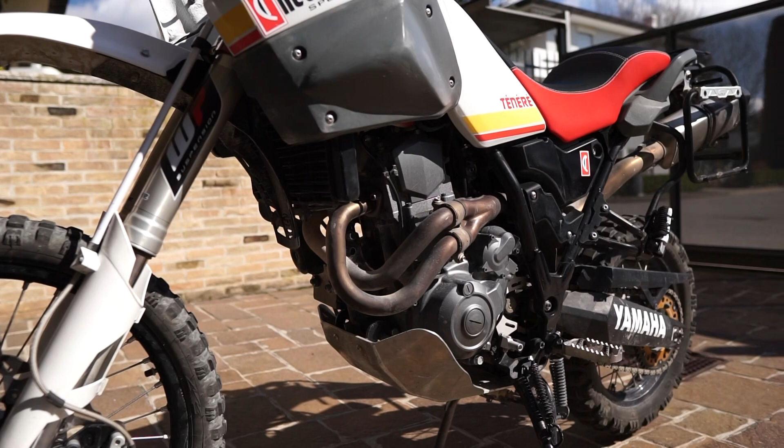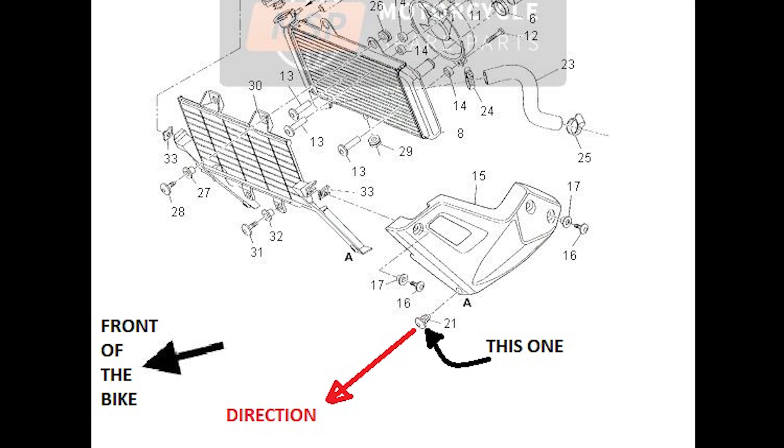We will start with the easy side of the bike, the exhaust side. The first thing to do is to remove the plastic clip in the bottom front of the side plastic panel. Just push a little bit the center of the clip with a screwdriver or any other tool that can fit, and then push it out from the holes in the plastic of the radiator guard and the side plastic panel, in a direction that goes from the engine to the front wheel.

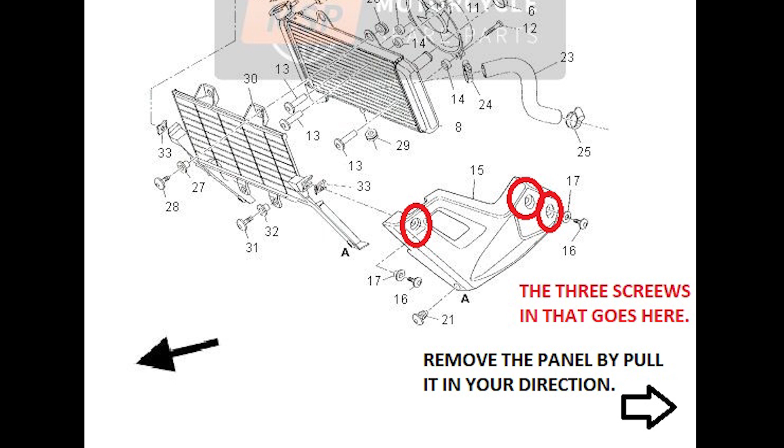Now remove the 3 screws that hold the plastic side panel in position, and then remove the side plastic panel from the bike. No fear, you will not damage anything.

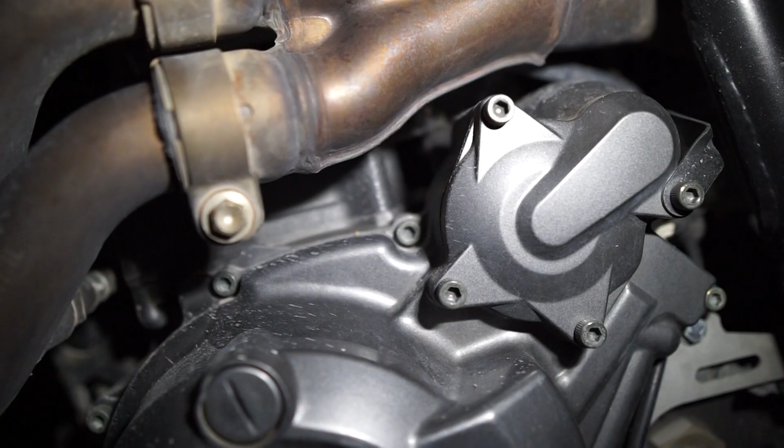At this point there is a steel heat shield attached to the bike only with 2 screws of the engine. Remove those 2 screws that I'm indicating to you to remove the shield. Put the screw back on, and with this side we are done.

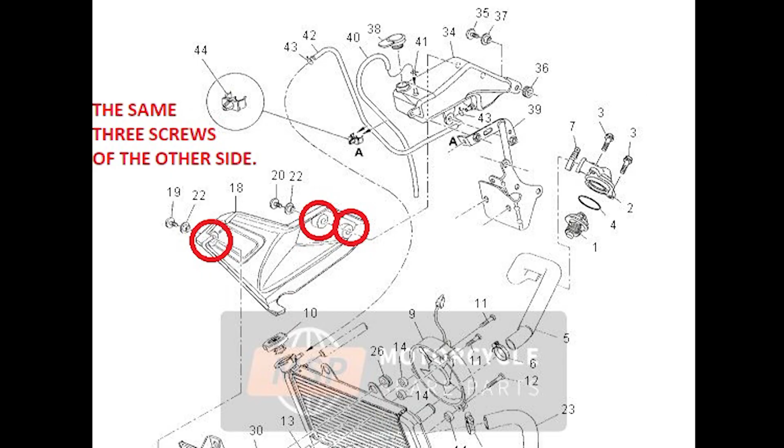Now let's jump into the part that all of us were waiting for, the side of the cooling tank. As for the other side, remove the plastic clip in the bottom front of the side plastic panel as explained before. Then remove the 3 screws that hold the plastic panel in position. As for the other side, you can see that the panel comes off easily.

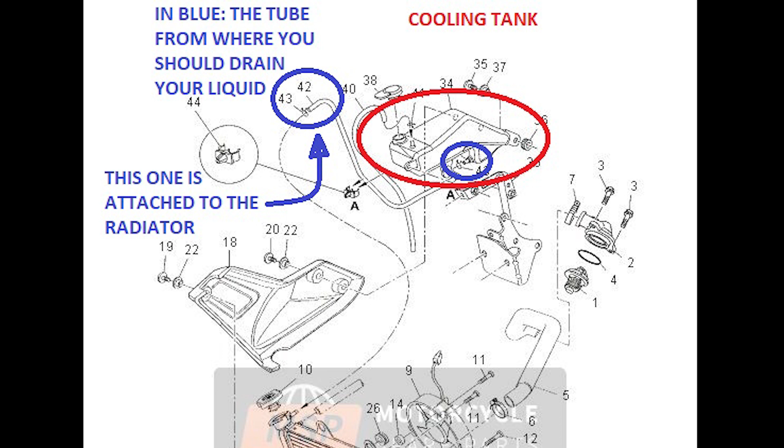Now drain all the liquid out from the cooling tank, then remove the bottom front tube that connects the tank to the radiator cap zone. Now unscrew the 2 screws that hold the tank in position and then remove the tank.

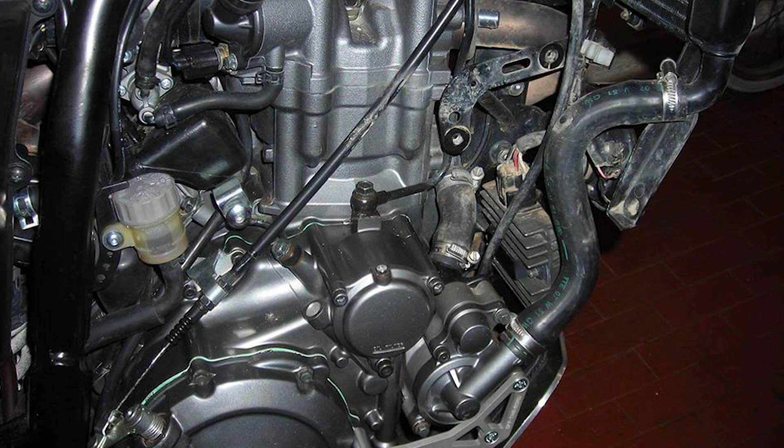Well done! We are very close to the end, but it's not done yet. To remove the bracket that holds the cooling tank in place, we have to cut it with a saw that obviously can't work properly in this small environment, so we have to remove the parts that at the moment are carrying it.

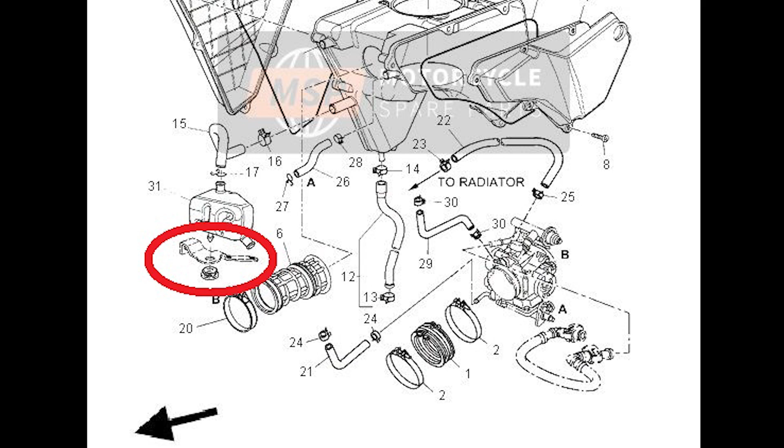In the back, the polished bracket is attached by 2 screws of the engine starter and the oil gas serpentine, so unscrew the first 2 and unplug the second one, then remove the plate.

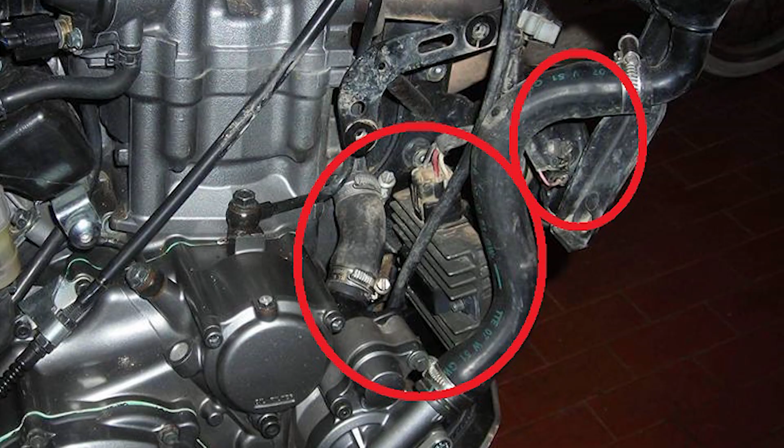Cut the unused pieces with a saw. Now, from the front, remove the voltage regulator and put it on your engine clutch carter. You don't need to unplug it. Remove also the horn and don't unplug it as well.

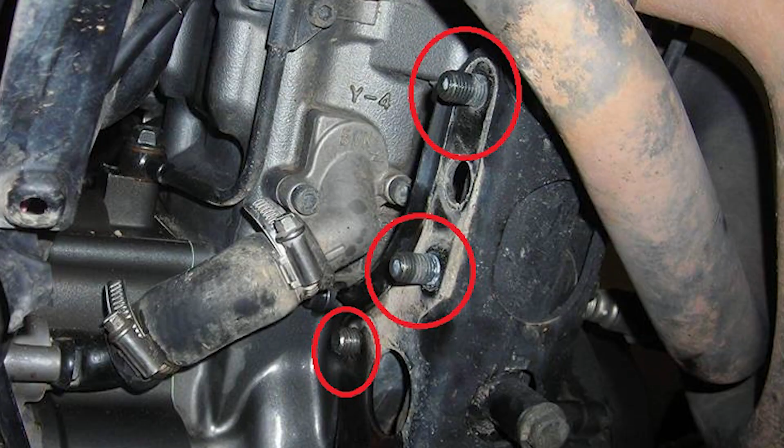Remove the 3 screws bolted on the frame that hold the front bracket in position. It's a bit tricky, but with the right wrench and socket wrench, this job takes about 1 minute.

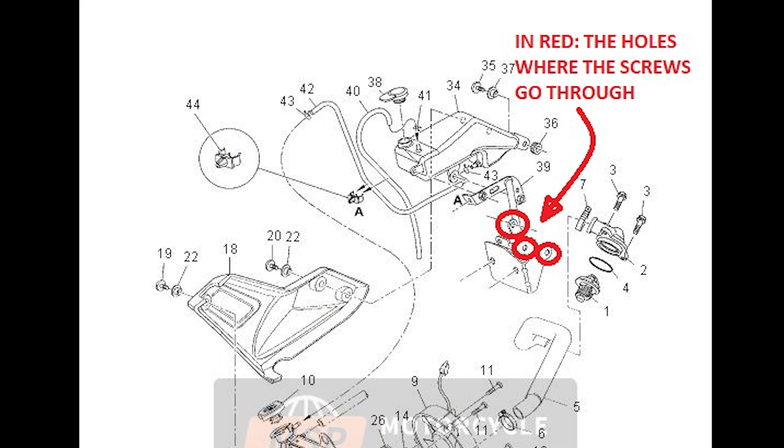Don't worry, your engine will not fall on the ground, so remove your bracket and again use your saw to cut the cooling tank bracket out from the front big bracket.

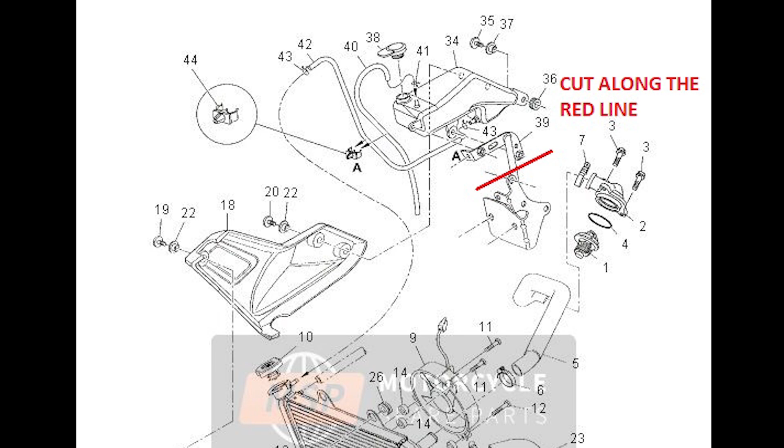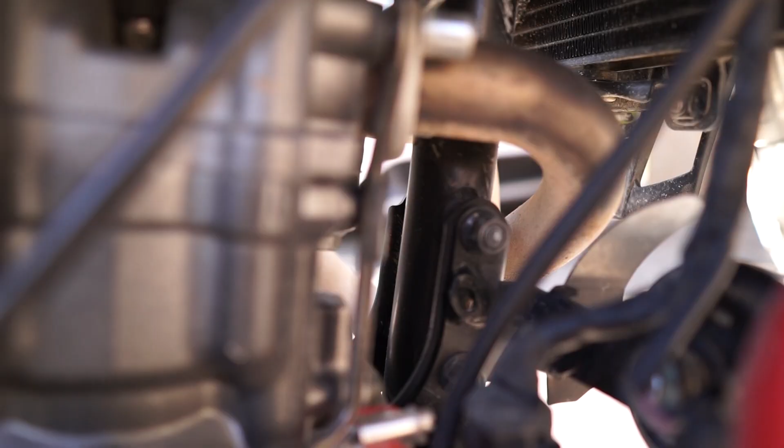Now, with a little corrective pen for car scratches, paint the uncoated iron and then put the bracket, the voltage regulator, and the horn back together on the bike using the opposite process of the one done before to remove them. Now we are done.

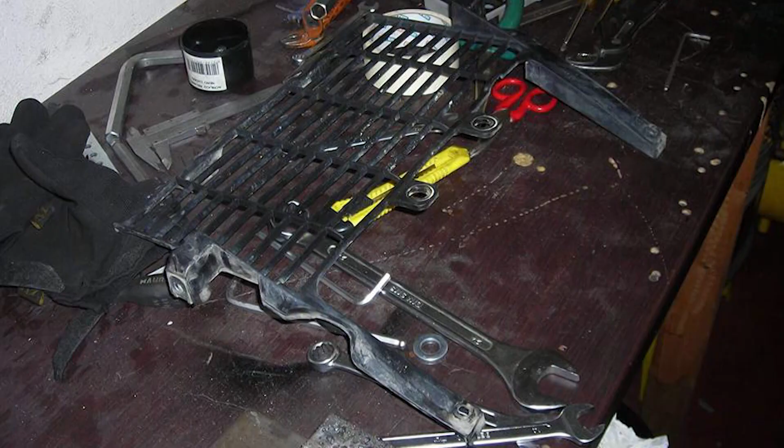Nope, something's missing. Alright, I forgot to explain about the radiator protection. Well, there is not much to say about that. It's useless, it doesn't protect anything at all. And after 6 years with this bike, I don't really know the real function—just remove it.

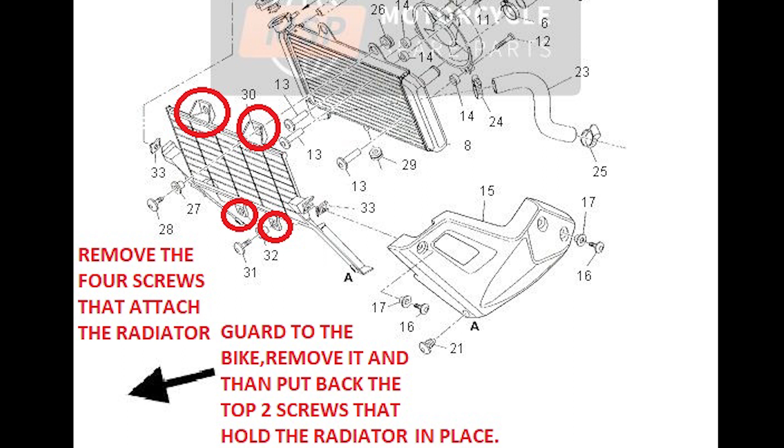I will soon make a video of how to build a proper radiator guard for the XT660Z, with also all the size and the possibility to download the project to make your own one.

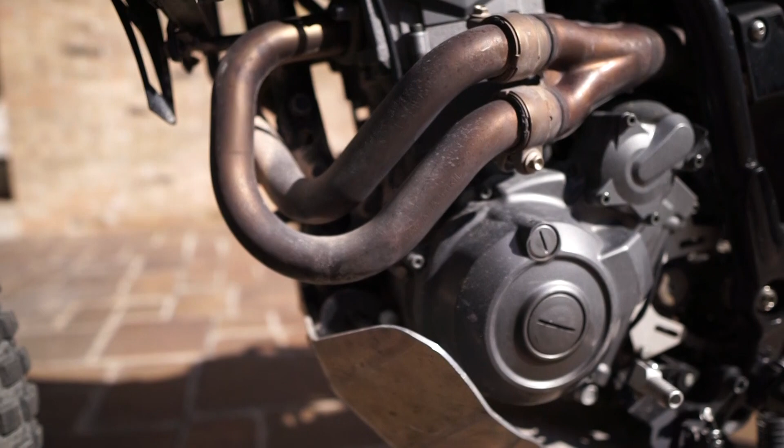And yeah, we have finished. Now you can see your XT in all of its beauty. Now everything looks higher, stronger, faster, but lighter for sure.